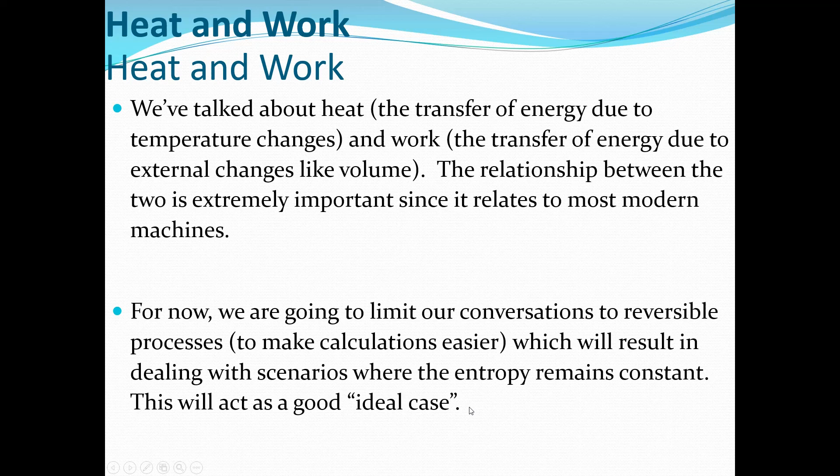All right, so we had du basically representing the internal energy. I had mentioned before that this tau d sigma represents the heat added or removed from the system. So we can actually rewrite this thermodynamic identity as this, or another way of writing it would be something like this. We're just replacing a lot of those terms like the tau and entropy with what it's supposed to represent, heat. Same thing with the work, we're getting rid of the pressure volume aspect and just going back to the basic, it's work.

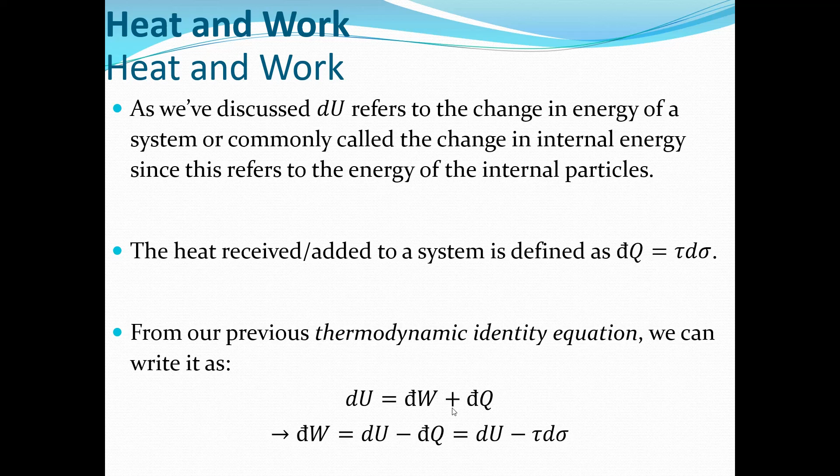Basically, whenever we talk about the term work, we're specifically referring to any form of mechanical energy. And yeah, that's pretty much it, nothing else from there.

So what this says here, and it's a very important aspect to note about these engines, is that when we're doing work, it is technically possible to take all of our work and turn it completely into heat. But it's not the same going from heat to work. Only a small portion of the heat can actually be turned into usable work.

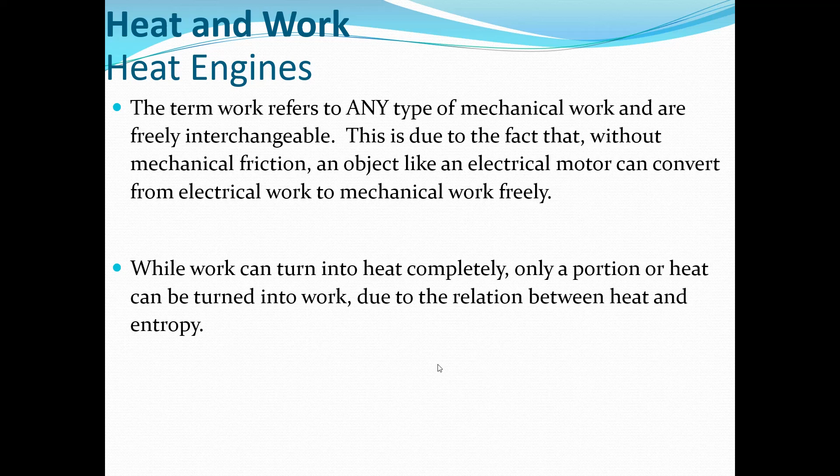And this is due to the fact that there's a very strong relationship between heat and entropy. And as you know, the entropy of a system can never go down. In these ideal cases, it can only remain constant, and in the real world, it will only increase.

So here, what it says is that as the heat enters into a system, then we also end up getting entropy entering into the system, entropy increasing within there. But the amount of entropy that comes in has to equal the entropy coming out. So the heat that enters in also ends up having to leave the system.

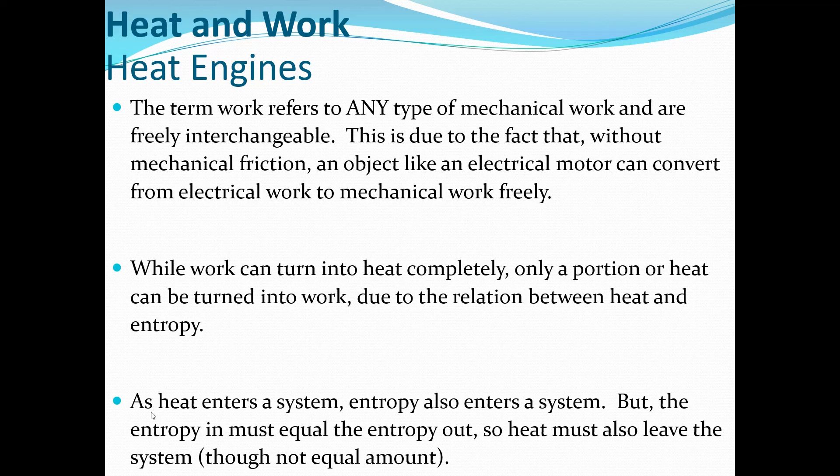Now, the important thing is that it's not an equal amount, mainly because of the fact that there's temperature involved. So if you remember, the entropy equation is heat divided by temperature, so there's pretty much an inverse relationship between the two. But if heat comes in at a high temperature, the entropy has to be the same on the other end, but that basically means that at the lower temperature, we're going to have a lower heat, essentially.

So this is the whole process of engines. In very layman terms, it's taking advantage of the natural flow of heat from a high temperature source to a low temperature source in order to get some usable work. Or another way of saying it, it's allowing heat to come into a system, getting as much work out of it as we can before we expel it into a lower temperature system.

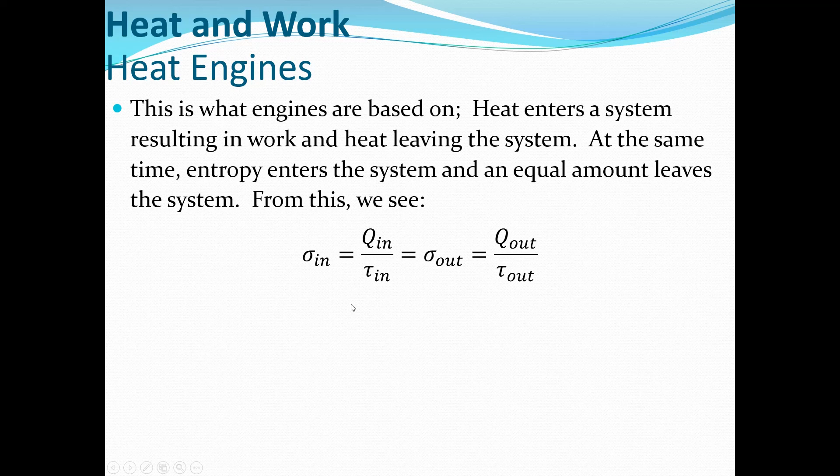So again, in these ideal cases, the entropy into the system has to equal the entropy out of the system. So that means that the Q over tau for both has to be the same.

The heat entering the system has to be greater because the temperature as it comes in is expected to be greater, since heat naturally flows from a high source to a low source. So temperature T in is going to end up being bigger than T out. And because these ratios have to be the same, Q in has to be greater than Q out. Because the inner terms are usually at higher temperatures and the outer terms are lower temperatures, we usually call these the hot section and cold section, or hot temperature and low temperature. I might not use the subscripts in and out, but you might see H and C, or H and L, or something like that.

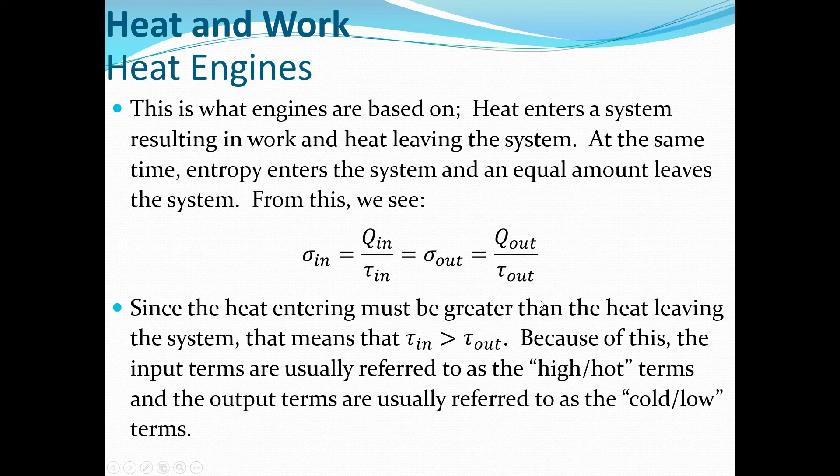One thing I should also mention is that when we're talking about these engines, remember an engine is a combination of processes that goes from some state all around to different states before returning back to that original state. When we say these processes are reversible, we mean the entire process is reversible. One single process may not end up having equal entropy because, for example, an isothermal process will end up gaining heat, but the temperature is not changing. So if we did a difference in entropy, we'd end up having either a positive or negative depending on if we're isothermally expanding or contracting. Essentially we'd end up having a different entropy based off of it because the temperature is the same.

The thing to note is that if we figure out the entropy, or the change in entropy, for every single process during a closed cycle, then eventually when we get back to the original, we will find that the two entropies are the same. This is something we need to make sure of: whenever we have a cyclical process, it's always set up so that the initial state going back to the final state will always end up satisfying this concept that the entropies remain the same.

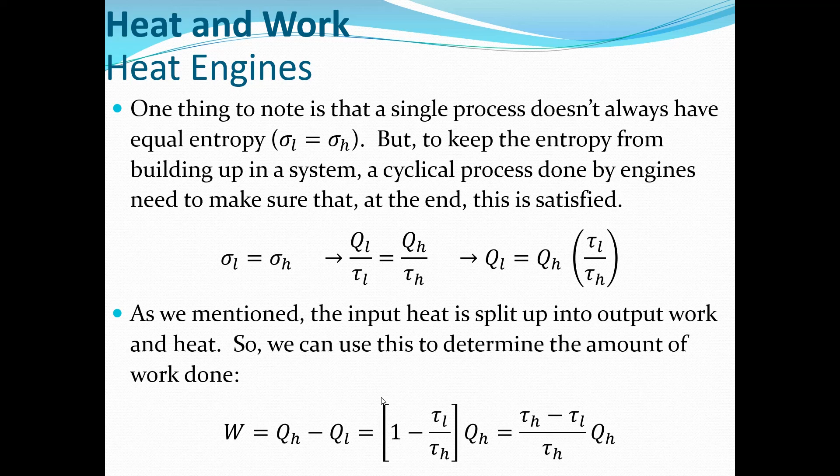So the amount of work that we get, and this is actually a straight definition of an engine, is basically always going to end up being equal to the difference in these heats. So if we get 500 joules of heat and 300 joules leave, those remaining 200 joules had to go somewhere, and in this case they're going in the form of work. This is just using the definition of conservation of energy.

But if we use this relationship between the high heat and the low heat into our work equation, we end up getting an equation that basically solves for, or is related to, the operating temperatures as well as this high heat term. We could also rewrite this so that it's in terms of the low heat. Doesn't really matter though.

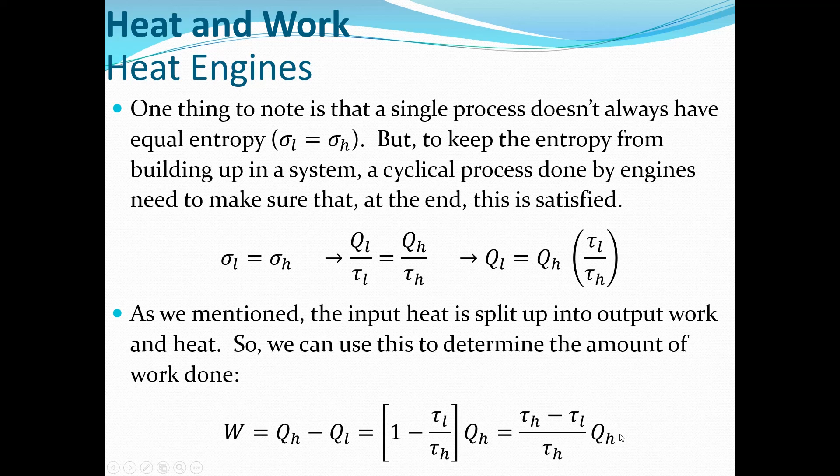Now we could also use this to create the efficiency of an engine. The efficiency of an engine, and this is true for pretty much any of these processes we're going to talk about, because we're not just going to talk about engines today, we'll talk about fridges and ACs too. The whole idea of efficiency is just like how you would normally think of it: a ratio between how much we're getting out, how much of the thing that we want, versus how much we're putting in. If we're putting in a whole lot of energy but not really getting a lot, that's a low efficiency. If we're not putting in that much and we're getting a lot, that's a high efficiency.

So what we want to get from a heat engine is work. That's the whole point. We want some sort of work, and the stuff we're putting in is that QH term. So efficiency for heat engines is defined as work divided by QH, because it's what we want divided by what we put in. Going back here, an engine that's 100% efficiency will be one that takes all of this input and turns it into work, essentially leaving no exhaust heat, that's QL. Remember, as I said, a lot of times QL is given that term or phrase as exhaust heat.

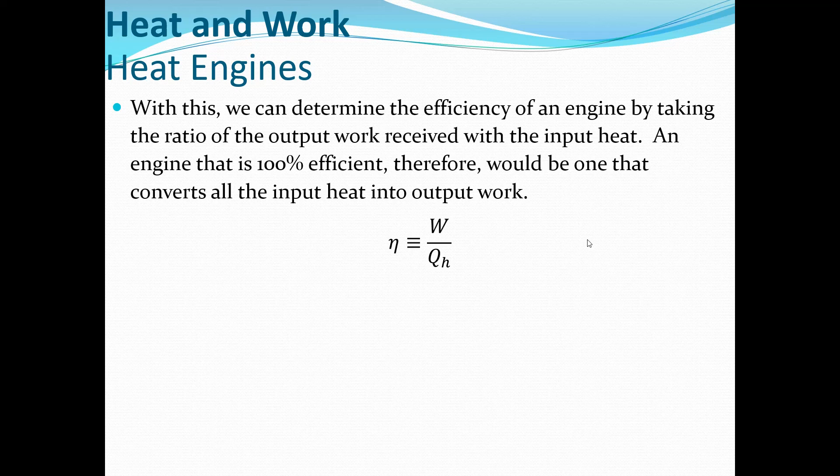So we can actually take this and rewrite it in terms of temperature. This is actually going to give us what we call the Carnot efficiency. So the Carnot efficiency, which is still this equation but for a reversible process, is represented by this. So this is what we can use in order to find the Carnot efficiency.

Now the Carnot efficiency, there's a few things I want to comment about it. First, as it says here, it is used as the highest possible efficiency for a cyclical engine. It's based off of the operating temperatures that it's working at, the high temperature versus the low temperature. So essentially, what this allows us to do is create an engine in the real world, and then by knowing the temperatures it's operating at, we can figure out the maximum possible efficiency of this engine.

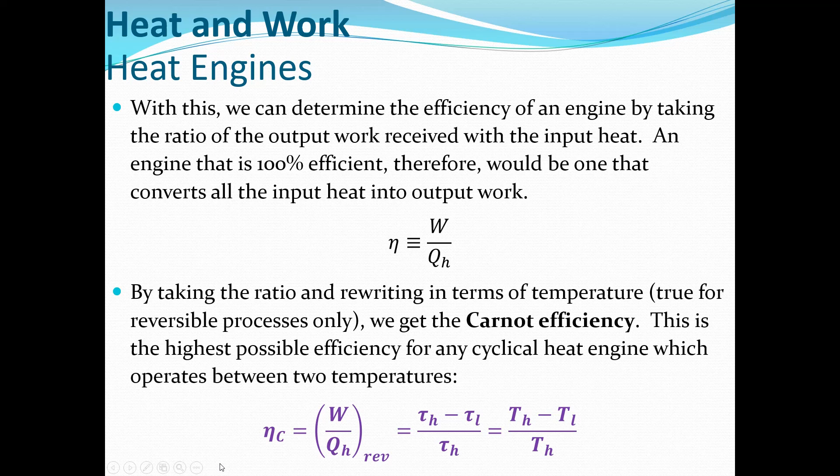And the efficiency that comes from the Otto cycle is a little bit different from this. So I just wanted to point out that there are actually other efficiencies out there based off of different engine cycles. So if you end up having a cycle that undergoes other types of processes, like maybe isobaric or isochoric, that would technically have a different efficiency than something like this, a different max temperature efficiency. However, this is pretty much good enough for us to answer a majority of the questions. So we're just going to use this as a nice little catch-all for peak efficiency. But I just wanted to mention that technically this Carnot cycle is a specific type of cycle.

So I said before that every single real engine is going to end up having some efficiency less than this Carnot efficiency. And that's mainly due to the fact that technically these entropies aren't the same. During a real process, a real irreversible engine, there is going to be some additional entropy created through getting the work, and this is going to end up giving us an output entropy greater than the input entropy.

This is usually caused by the natural friction that exists between all the things, and anytime we get some sort of energy change, there's always going to be some added form of entropy.

So we can actually go back to the equations and just get a representation between the irreversible and the reversible process to show that this is true. So what we can do is say that for any engine, real or imaginary, reversible or irreversible, we end up having this situation that the exhaust entropy is always going to be greater than or equal to the input. That means this is always going to be true, that the exhaust heat is always going to be greater than or equal to the input heat times the temperature ratios.

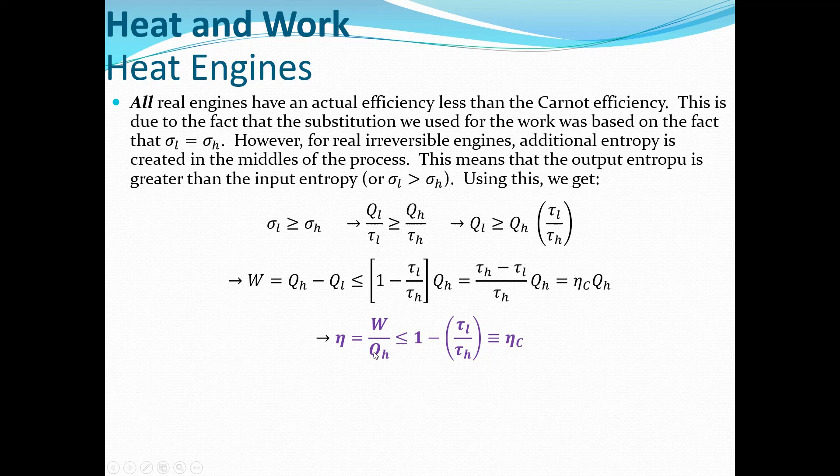This equation is a very specific case, specifically for Carnot efficiency. So make sure you keep an eye out for it. Don't just immediately plug numbers in if they're asking for efficiency. You want to note whether it's specifically asking for the Carnot efficiency or the maximum possible efficiency. This statement basically says that the actual efficiency is always less than the Carnot efficiency, which is what we can call the Carnot inequality.

It's showing these three statements. The first is that real engines can never be more efficient than their ideal case, their ideal counterpart. There are different types of processes and engines. If you compare a combustion engine with the reversible ideal steam engine, that's not really going to work because those are different types of engines. So you need to make sure you're relating it back to its ideal counterpart.

The other point is that this temperature ratio really dictates how efficient an engine is going to be. As this ratio gets closer to zero, your efficiency gets closer to 100%. Or another way of saying it, the exhaust temperature has to get towards zero. The closer this is to absolute zero, the closer this becomes to a perfect efficiency engine. So this also means the only way we can possibly get a 100% efficient engine is if our exhaust temperature goes to absolute zero, which, as far as I know, is not really possible.

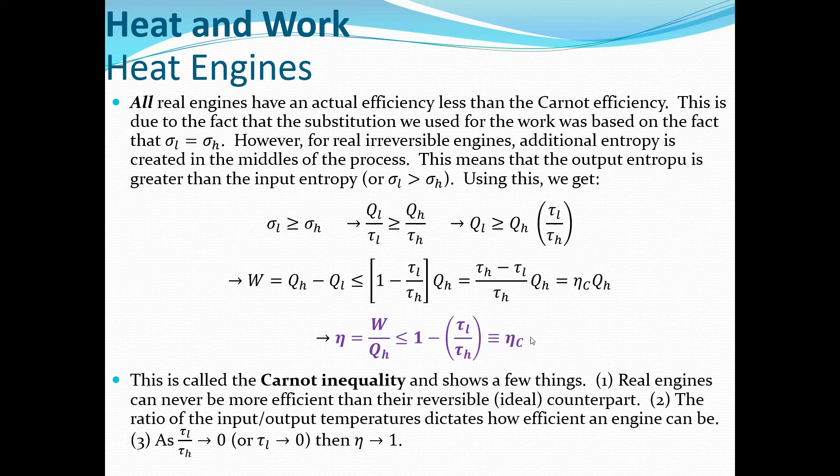So TH and TL are usually the operating temperatures. Typically for most engines, TH is the temperature of what's going on inside the engine, while TL tends to be the environmental temperature around it. Going back to what I said before about how the only way we'd get 100% efficiency is if our exhaust temperature was at absolute zero — that means we'd have to have the engine running within an environment that's at absolute zero.

Now, you might think, is it possible to take this engine and send the exhaust to a container that's at absolute zero? You'll see why in a bit that this is not possible.

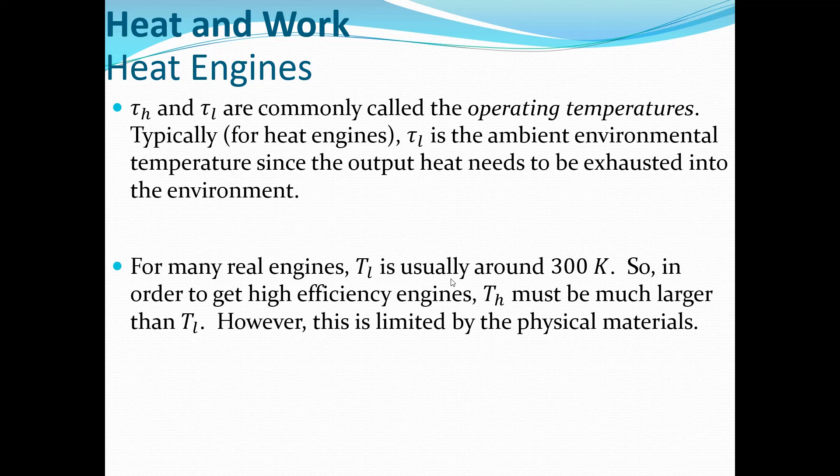In real engines, the ambient temperature is typically going to be around 300 Kelvin, because that's the typical environmental temperature around us. What that usually means is that in order to get very high efficiencies with this natural 300 Kelvin ambient temperature, we have to get the ratio as low as possible, which means making TH even higher than this ambient temperature. But the problem is that the substance we work with limits how high the temperature can be. We could technically make an engine where the highest temperature is as hot as the sun, but none of our physical materials could actually sustain it. So you need a balance — getting the temperature as high as possible for the materials you're working with, with that ambient temperature of 300 as a limiting factor.

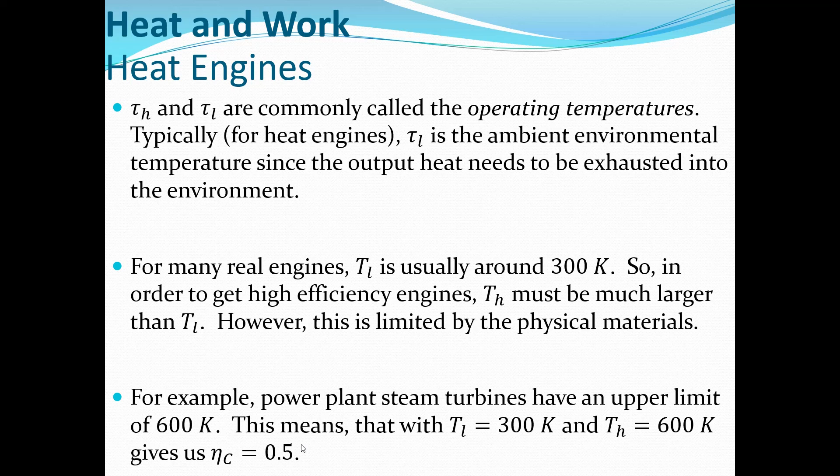Here's a typical example. For a lot of steam turbines, the high temperature is going to be typically around 600 Kelvin, so that means the Carnot efficiency is going to be about 50%, as I mentioned before. But if we actually look at the actual efficiencies of these, it would probably be closer to 30%.

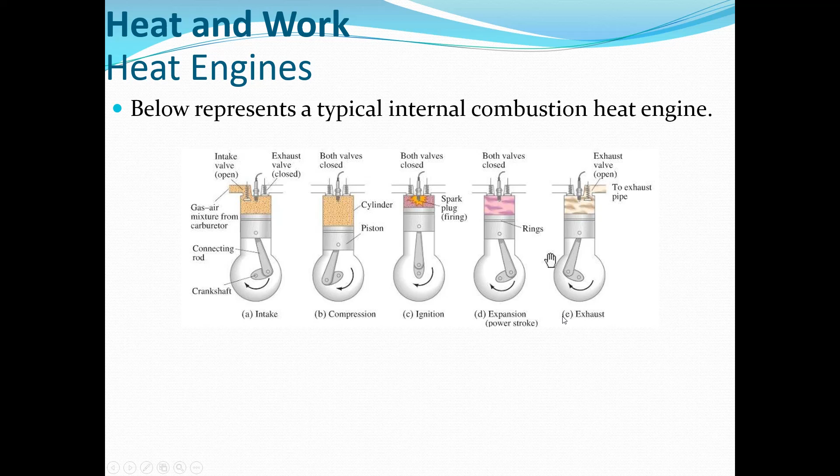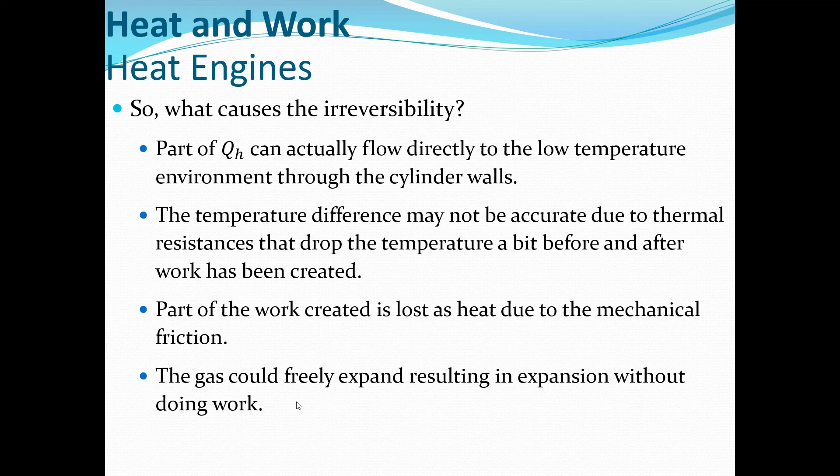Another issue is that the temperature difference may not be as accurate as we think. Also, part of that work ends up being lost through friction and heat. Here, this would become a big issue because the gas might end up having a free expansion without doing any work. The whole idea is that there are things going on that we can't fully account for, and as of now, can't really limit as best we can.

So with that being said, we'll do a few practice questions dealing with these heat engines. Pause the video, work on it yourself, and we'll go over it in a second.

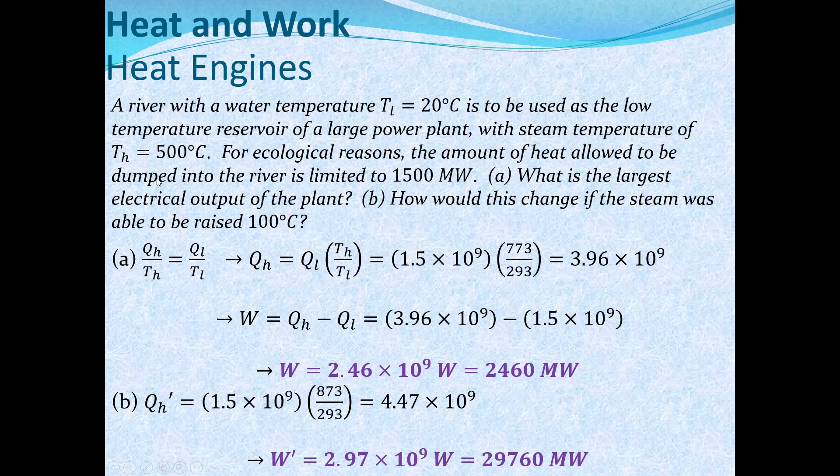Now it asks how this would change if we raise the steam temperature by an extra 100 degrees. So we redo all that calculation. Redoing the input heat calculation, we get that it's a little bit higher, and we find that the final result ends up being essentially a little bit under 3,000 megawatts. So it increases by only about 500 megawatts. It's not a huge increase in our energy output, despite the fact that the temperature increase would actually be probably much higher than we could sustain.

All right, here's another question. Pause the video, work on it yourself, and we'll go over it in a second.

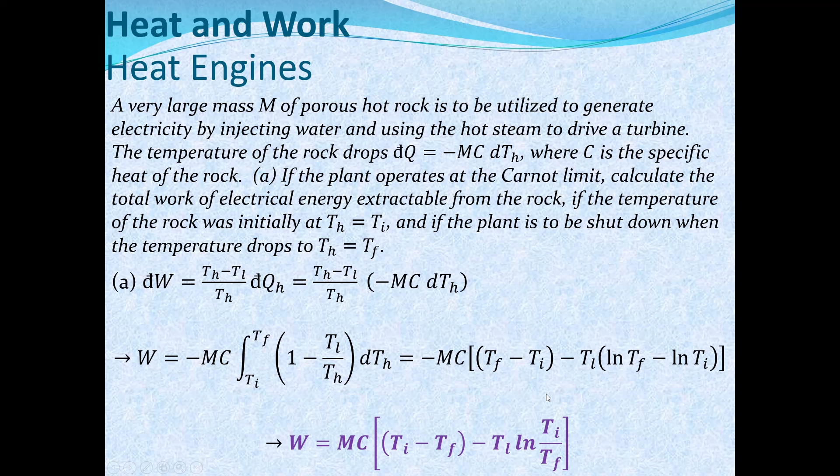All right, here's a continuation of that. Pause the video, work on the stuff, and we'll go over it in a second.

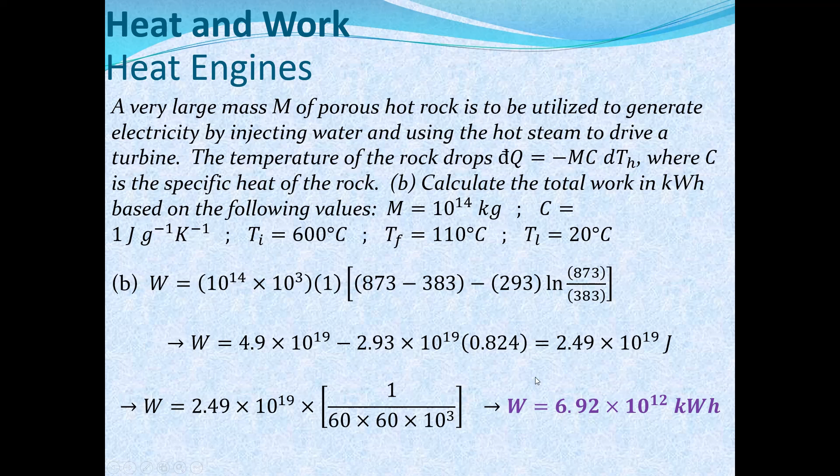All right, so from here I just take the equation that I found and plug in all the numbers they're giving me. I get that the work ends up being 2.49 times 10 to the 19 joules. Now, they want this in kilowatt hours, which is a very common unit of energy, so we have to play around with the units to get there. We divide by 3600, since joules is technically watts times seconds, to bring it to hours, and then convert to kilowatts, giving us this number of kilowatt hours.

All right, I'm going to pause the video there, and we'll continue our discussion when we take the reverse of these heat engines in order to create fridges.